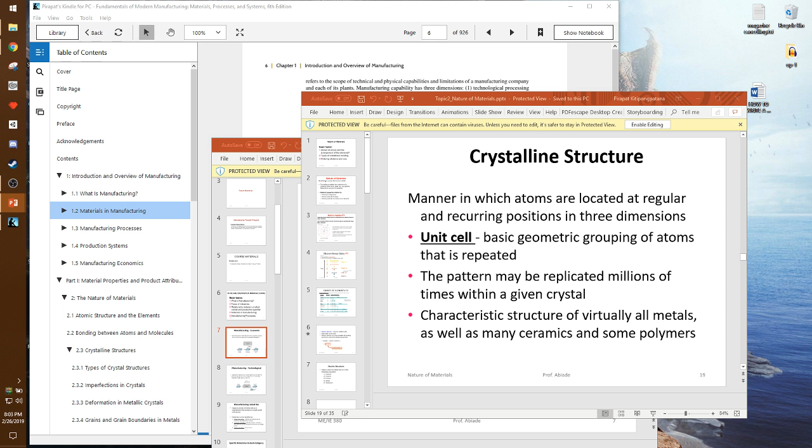This is only halfway for education. This is more for entertainment, for my entertainment. Maybe I should turn this app back to entertainment instead of education. I have no credentials. I am just a student in mechanical engineering. So I'm not teaching anything because I'm not a teacher. No!

There's economics, the economic way of viewing manufacturing, where you put value into a thing, so that you can sell it for more than what it costs you to get it.

How many can I have? Yeah, as many as you want, Chris. Is there always chicken on it? Chicken? Is it chicken? I don't know. Why is there chicken on it? There's a lot of stuff on it. There was ham on it, and I was like, "What? There's ham on it?" It's always in the box. Yeah, Papa. Was it? I don't know. I saw it in the box this morning. I think Papa John's gives peppers, right? Not sponsored. Sponsor me, Papa. Oh wait, no. I don't know if I want to be sponsored by Papa anymore. They called him racist. And we don't deal with people who are called racist, like PewDiePie. No! No, you stop it right now. No, let's not get political.

Okay, technological. Manufacturing industries. You got primary, secondary, and tertiary. So for primary industries, think about the people that go outside and get the stuff. You got agriculture, they grow the foods. Or forestry, they cut down the trees. Fishing. They stick their hands in the rivers for the fish. You don't need to know much about that. The manufactured products. Don't need to know about that.

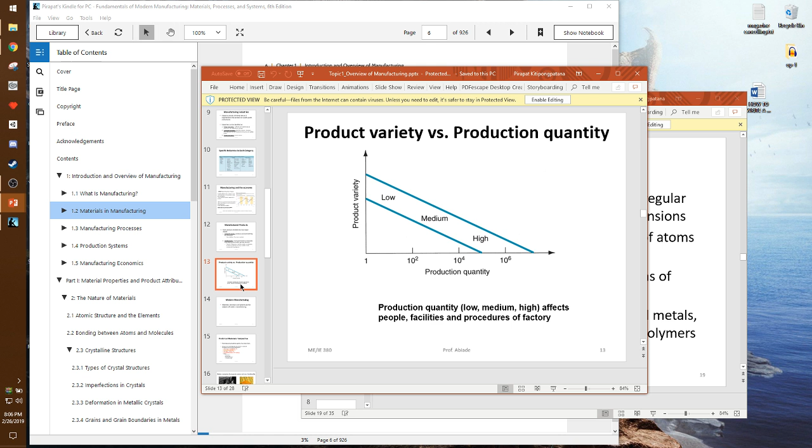The washing machines are flashy, but okay. I cannot attest to their longevity. But this isn't a washing machine review channel. This is a Watch Perry struggle channel. Huh? Washing machine is good. Washes them good, real good.

Materials, processes, blah blah blah. Mining, blah blah blah. Historical materials, blah blah blah. Polymers are powerful classes of material. Okay, cool. Metals. One of the 3 major manufacturing materials. First, you got the metals, you got the ceramics, and you got the polymers. But let's talk about metals. You may be familiar with metals and what metals are. There's metal. There's cold metal. There's magnetic metal. Oh, here.

There's Fe, Al, Cu, Ti, Au, and Ni, otherwise known as iron, aluminium for you Brits and non-North Americans. I call it aluminum. See you later. Copper, titanium, Au. Come back here with my gold, and nickel.

We'll talk a lot about metals. Actually, I think this first test is a lot about metals. You got ceramics. Ceramics are really hard. Oh wait, no, yeah. Metals. The atoms are highly ordered. You find them in like crystal structures. They have long range order and stuff. They're very structured. Mostly because of how they bond. I guess this is all because of how the atoms bond.

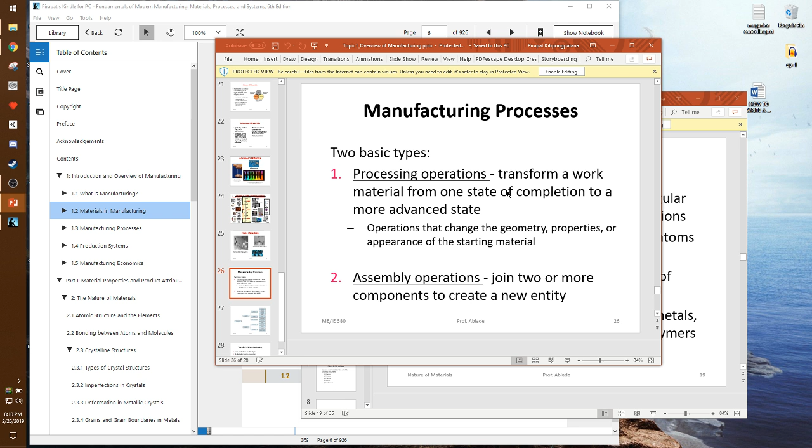So there's two basic types of manufacturing processes. There's processing operations that transform a thing, like a block of aluminum, melt it down, and push it through a hole to get extruded aluminum. Or bending sheet metal to make a thing. And then there's assembly where you get the sheet metal that's bent, and then you put screws on them or weld them together, join two or more components to create a new entity. Those are two different manufacturing processes.

Blah blah blah. Trends, blah blah blah. Six Sigma, whatever. All right, moving on. Nature of materials. Atomic structure, the atoms and stuff. Atoms are expensive and important. Got interatomic bonding, ordering of atoms and ions and whatever.

Where am I at? Oh, jeez. These pages. Yeah, a couple pages in my notebook are torn off pages that I kind of just pushed back into the binding because I took the notes in the wrong notebook and I wanted to have the pages in the right place. Oh, shoot! I forgot, that way I can have a cheat sheet. All right, let's make that around. Cool. Huh? What?

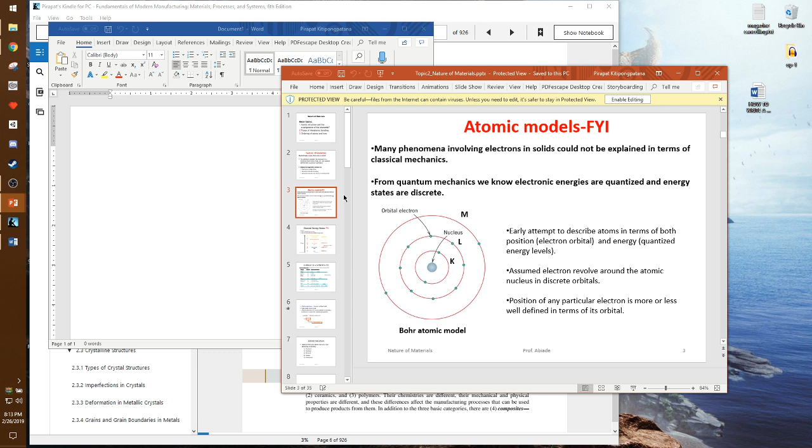What is my credibility? My credibility is that I took a chemistry class before in freshman year. So 1s2, 2s2, 2p6, 3s2, 3p6, 4s2, 3d10. I didn't say I didn't do well. Did I say that? Oh. Well. I didn't do terribly. That's fine. That's beside the point, because all the chemistry I need to know right now is here. It's fine. It's all good.

Fine and dandy. Valence electrons. Valence electrons are the electrons that you find at the outer shells, or the outer energy levels that atoms have. Filled shells are more stable, and atoms want to be stable because stable. They like each other. Valence electrons determine basically all the properties of an element, because that's how the elements interact with other ones, with their valence electrons. Got the periodic table, got all this group stuff. Maybe I should just have, no, that's silly.

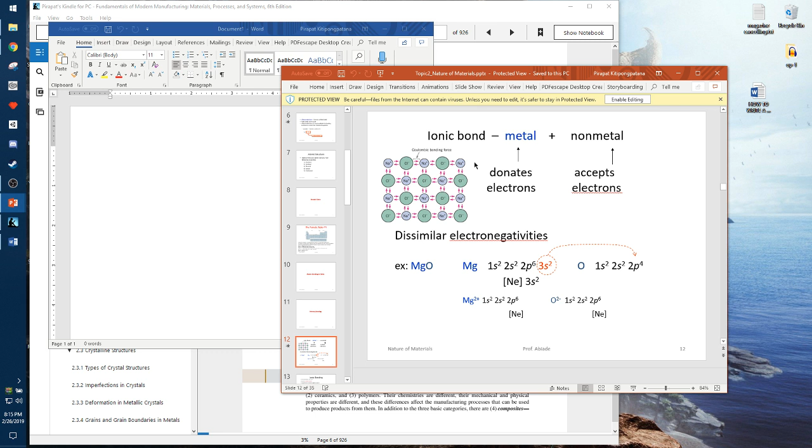Atomic bonding and primary bonding. You got the ionic bonds. Wait, no, primary bonding. Primary bonding happens between elements. This is going to be important for the different types of materials. So ionic bonding generally happens in ceramics. You got a metal and you get a non-metal, then they like each other a lot. You got the cation and the anion. Cations are the positive. That means they give away the electron. That's gonna be the metal, sorry. It's usually the non-metal, I think.

Nope, says right here, cation, usually the metal. So the cation is usually the metal. It gives away its electron to the anion. You can remember this by noting that cations are positive because they're cats.

Ionic bonding: it's a direct transfer of electrons. So, no. There's no mommy and daddy here. There's just a metal and a non-metal. The metal gives its electron to the non-metal. Oh my god, this is marriage. They're stuck together really strong. And because of this, ionic bonding is the strongest of the primary bonding types that we covered. Because of this, you can guess that the materials that have ionic bonds within them are really strong. Probably brittle. Ergo, ceramics.

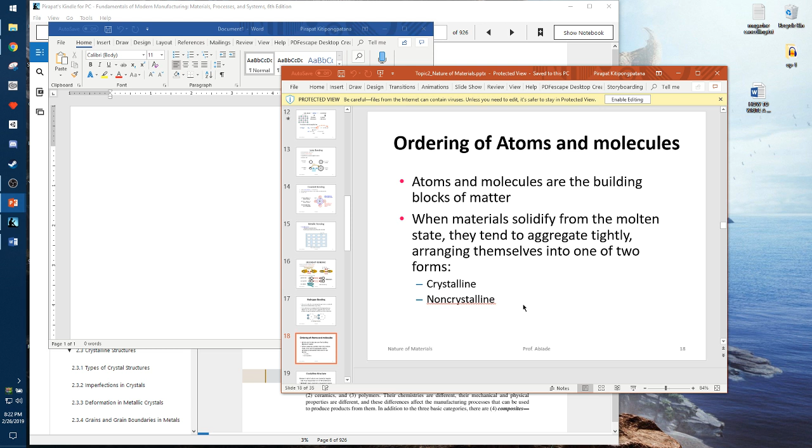Manner in which atoms are located regular with a unit cell. Basic geometry. Oh yeah, we know what unit cells are, right? I didn't say that. That is not true. You know what? Yes, that is true.

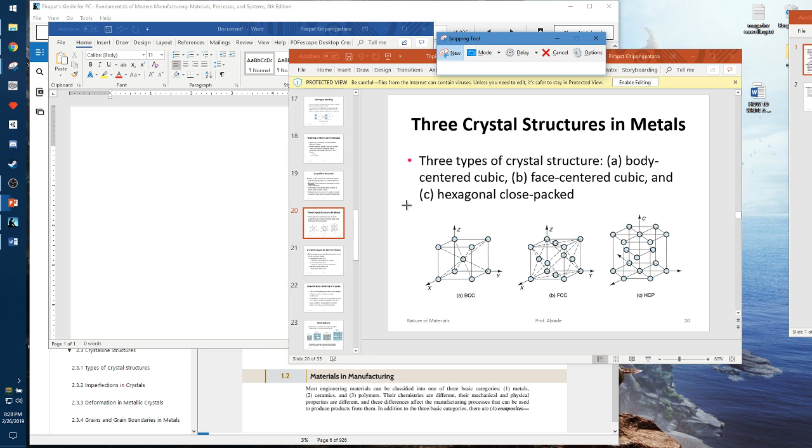Frenkel defect. That's a funny name. Oh wait, I have to make sure that I'm allowed to put pictures on my cheat sheet. Why does he call it a cheat sheet? Not cheating if it's allowed. The test will cover topics 1 through 7 of the notes posted on Blackboard. You're allowed to use a cheat sheet during the exam. You may write whatever you want on one side. It must be turned in with your exam.

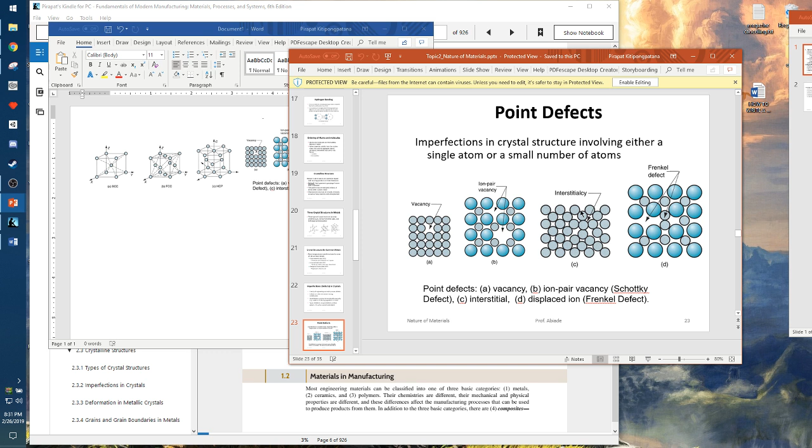Imperfections in crystal structure involving either a single atom or a small number of atoms. Okay. Either one of them goes away or you add some. Vacancy, ion pair, vacancy, ion pair. Oh, yeah. Because the big one and the small one pop out and they probably became an ion outside. Interstitialcy. That's hard to say. Good thing there's no vocal part of the exam. Frenkel defect, that's when this is moved over here.

Cool. Line defects, also known as dislocations, can take two forms. You got the edge dislocation and the screw dislocation. Connected group of point defects that forms a line in the lattice structure. These are important later when we learn about cold working, work hardening, something like that.

Hi, I'm not Michael Scott. And this isn't Michael Scott.

Edge of an extra plane of atoms that exists within the lattice. Sorry, not the lattice. No! Edge dislocation. I didn't understand this picture when he went over it in class. He said it's an edge of an extra plane of atoms that exists in the lattice, but it looks like there's an edge that's missing. I guess this one's extra. Yeah, I guess it all depends on how you look at it.

We don't have any calculations during this exam. I didn't have dinner yet. He said that we're not going to do any calculations during this exam, so it's probably going to be real conceptual.

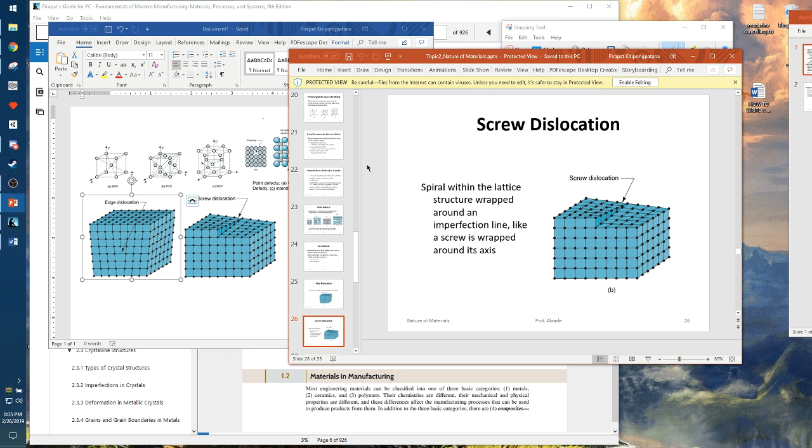Interfacial or surface defects. Surface defects, okay. Surface of a crystalline object is an interruption. Grain boundaries are internal surface interruptions, blah, blah, blah. What? Wait, so are grain and grain boundaries surface defects? Let's see. Oh yeah, grain boundaries are an internal surface interruption. Mm-hmm. Each of these chunks is a crystal. And when the crystals grow and smack each other, that's where you get grain boundaries.

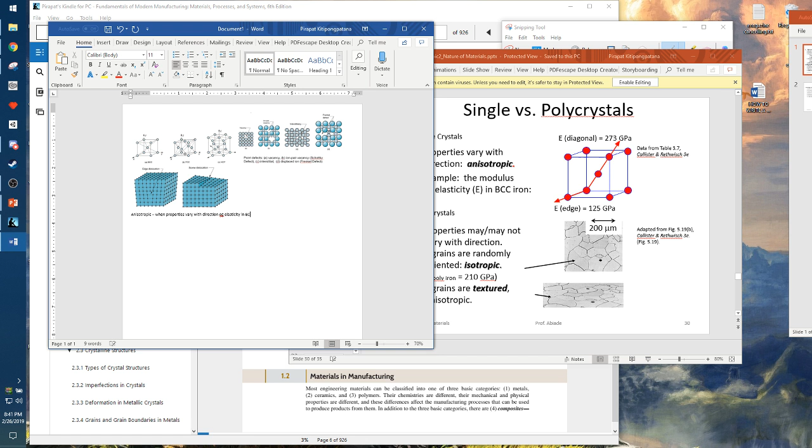E.g. If grains are textured, you get anisotropic. Yeah, textured grains usually means there's some sort of crystalline structure because it repeats over a relatively long distance compared to an atom size.

Distance. Electron microscopy. Grain boundaries. What's this? Polymorphism: two or more distinct structures with the same material. That means you get different properties.

I got a 95. On what? Reflection journal. Nice.

Thanks for warming up the pizza. What'd you do with the olives and mushrooms that you picked off? I ate some. You did? Yes. Why? It was disgusting. This isn't cold pizza. It's not cold pizza. Papa John's, good cold and hot. Not sponsored. You don't deserve that pizza. Give it back. To John? I don't like that anymore. Wait, what? Why is there a bite taken out of this slice?

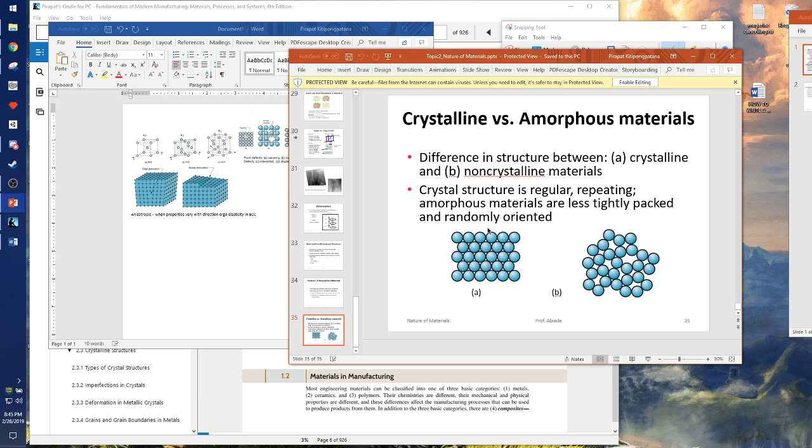And remember guys, glass is not a liquid. Glass is a liquid. Did I ever tell you about that? Glass moves, I told you about this, very slow. Glass is not a liquid. Glass moves very slow. Oh my god!

Alright, let's review. Did we learn all this? We went over electronic structure, types of bonding, crystalline structures with types and defects, amorphous materials, lack of order, and differences in melting and solidification.

Okay, I don't remember the differences between melting and solidification. Uh-oh.

Glass is a supercooled liquid. Who says that? Scientific American. Who says that? Glass is an amorphous solid. States somewhere - solid! A state somewhere between those two states of matter. No! Yes! That's what amorphous solid means! Amorphous solid means it's a solid without a distinct crystal order. It's a liquid. Fly, banana! Go drink some glass.

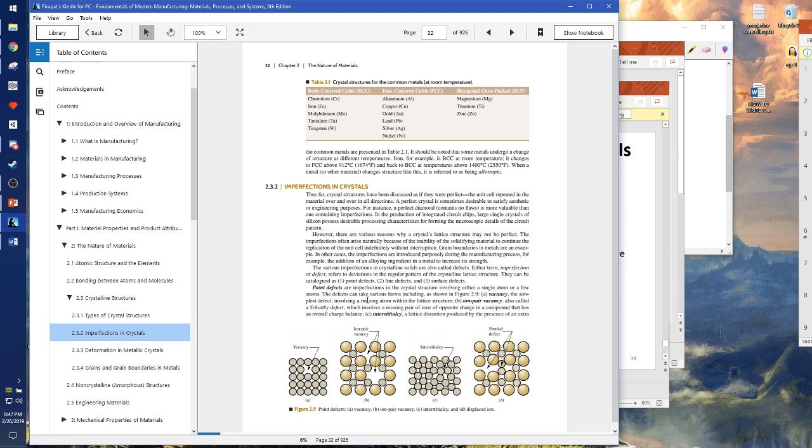You can't drink glass. Why? Because the atoms in the glass move too slow. So you're saying you can never drink glass? Well, if you want to live to be 100 years old, you can probably drink glass. Okay, but you gotta start drinking it from when you're 5. Okay. We're on the same page? Okay. Blah blah blah book, blah blah blah. I'm a book and I'm boring, said this book. I'm glass and I'm liquid, said that window. What? I'm tired. Go drink some glass. I would, but I can't because I'm already a quarter way to 100. Girl, you ain't 25. You're right. You 50. That's... Stop, what? He's 75? You're already 99. Ah, okay. That's not fun for that.

With that - metals have crystalline structures in the solid state almost without exception. Ceramic molecules are characterized by ionic or covalent bonding or both. The metallic atoms release or share electrons, blah blah blah. Ceramics possess either crystalline or non-crystalline structure. Most ceramics have a crystalline structure.

Like salt. I'm changing my name to salt, to Michael Scott. Whereas glasses based on silica are amorphous. In certain cases, either structure can exist in the same ceramic material. When this mineral is melted and then cooled, it solidifies to form fused silica, which has a non-crystalline structure.

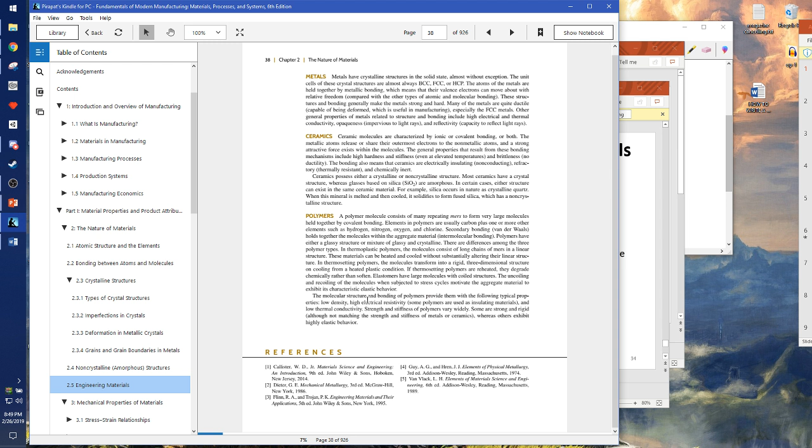How many mers you got? Cause I got a lot of mers, cause I'm a polymer. Just living on the floor. Huh? And I'm calling the police. And I'm recording your channel. We're pretty much just don't for what? For what? Copyright.

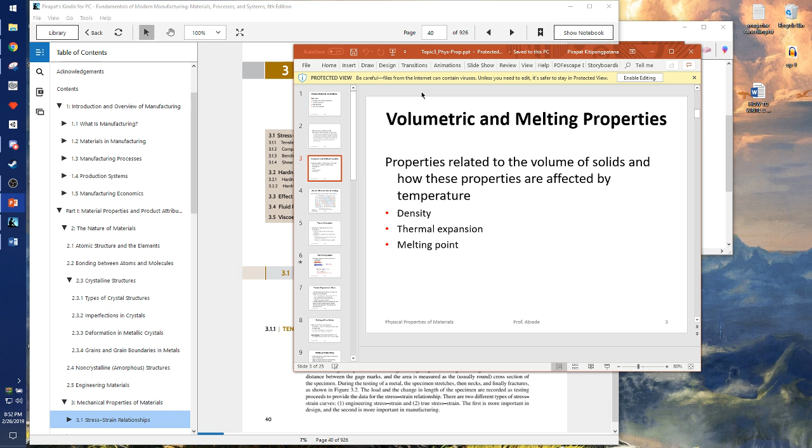Density, thermal expansion, melting point, atomic vibrations due to heating, thermal expansion. What do we need to know about this section? Density, thermal expansion, melting, and diffusion.

It's like nothing, a humidifier? In general, the density decreases with increasing temperature, right? In general. Now there's one thing that's very common that breaks this rule, breaks this generalness.

Do you know what it is? Glass. Water. I was close. Because water is a liquid. No! Glass is also a liquid. No! God, please, no! Michael, no! No! Water, the density decreases when you freeze it.

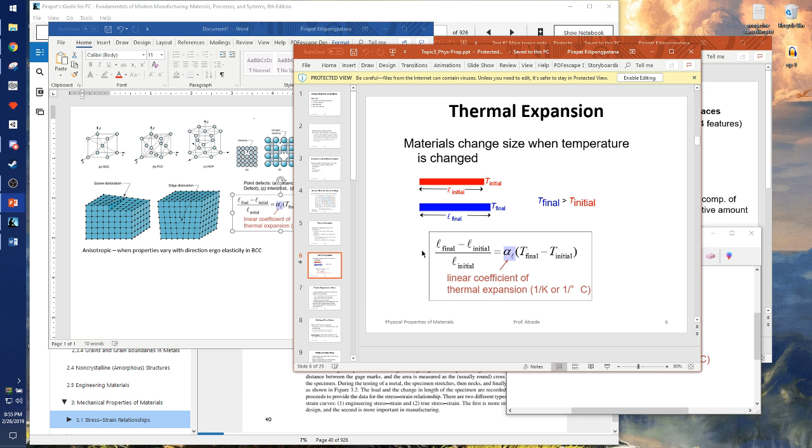Stop it. Thermal expansion in manufacturing. You can use it for a shrink fit, that's when you get something cold and put it back into something, and when it gets warmer, it fits. Thermal expansion can be a problem. Welding, blah blah blah. Melting of pure metals, heat of fusion.

I know what that is. Melting of metal alloys. TM is the melting temperature. Melting of alloys, alloys don't have a single melting point. Oh, this is where we talked about phase diagrams and stuff. These are pretty important, maybe I can look at this.

It's $16. You know what else is $16? The bag that I want is $16. 160 chicken nuggets from Burger King. You know that because you've done that before. No, I've only done 100. I've only done nuggets in the 100. How come you didn't upload the nugget challenge then? I didn't do the nugget challenge. It wasn't the nugget challenge. You guys want to see a nugget challenge from this channel?

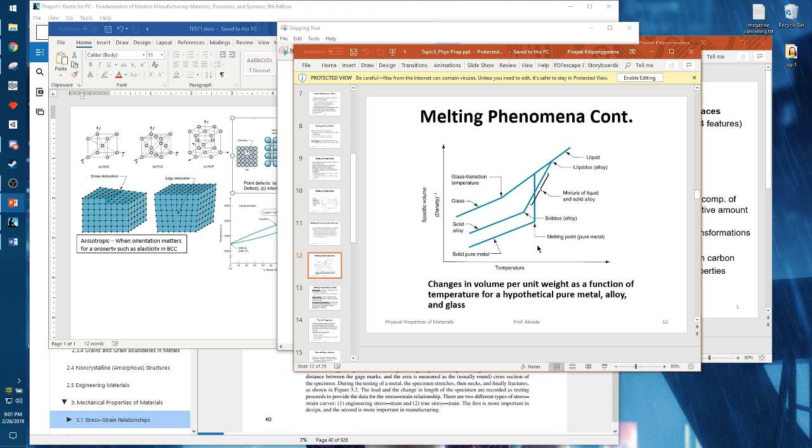Say it again. I don't have time, I'm running out of time. Okay, big news.

In half an hour, I will reveal the next Papa John's promo code. I wonder if it's location specific. Wouldn't that suck?

Fun fact: the linear coefficient of thermal expansion is a material property. Based on the three broad categories of materials - metals, ceramics, and polymers - polymers would expand the most, metals second most, and ceramics the least. We can come to this conclusion by thinking about the way they bond. The tight ionic bonds require a lot of energy to break, so ceramics probably don't expand much before they just shatter.

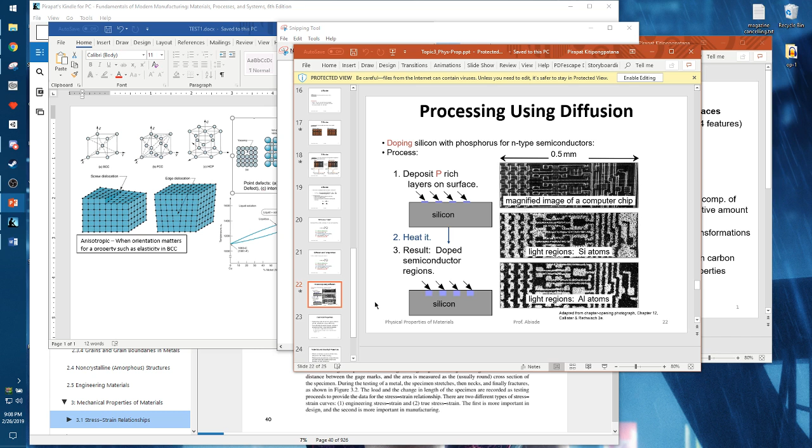Dope the silicon to make it semiconduct - oh yeah, that uses diffusion. Electrical properties: engineering materials exhibit a great variation in their capability to conduct electricity, like copper conducts electricity really well while wood doesn't.

Dimensioning surfaces and the... whoa. Did I miss a day? Nah, electrical properties, blah blah blah.

Metals are best conductors because of metallic bonding. Ceramics and polymers are probably poor conductors, and many materials are used in various applications. Alright.

I found it, I found it. I have found the gum - the Trident Minty Sweet Twist. Artificially flavored.

Ah! Of all the angles you could have thrown it at. No one saw that, no one saw that. This is a no camera stream. Oh my god. Aw, that was funny.

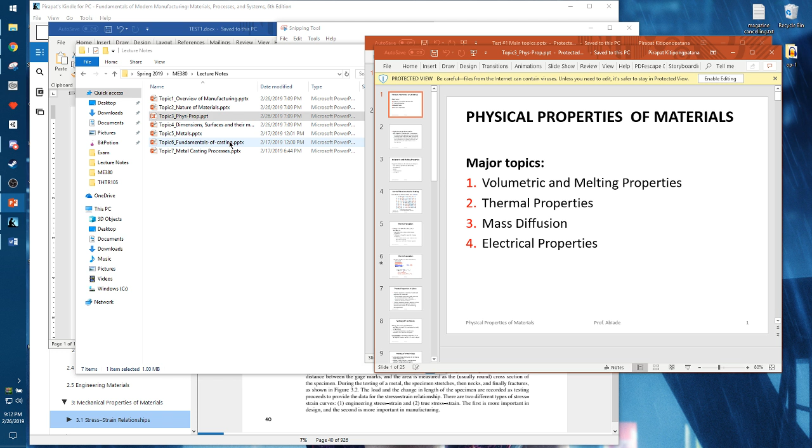Just stop licking the gum. I'm gonna be okay. This is the wrong topic. What? Oh, distracting you? You are not distracting me. Are you sure? My stream is distracting me.

I'm gonna be taking the exam, and I'm gonna want to be talking out loud during the entire exam, and that's a big no-no. I'm gonna be like, oh, surface texture, I remember 4 features. And it'll be like, shh. And I'll be like, you, give me your exam. And I'll rip it in front of the whole class. And I'll be like, oh man, come on, professor.

Dimensions, surfaces, and their measurement. Let's see. We're going to learn about the definition and types of tolerances. We're going to learn the types of surfaces, and we're going to learn 4 elements of surface texture. We're also going to learn about surface integrity. All right. Dimensions. That's the dimension. Tolerances. That's how much we allow a material to be manufactured differently from the nominal dimension.

So if I tell you to make a steel rod that's 1 foot long, I have to tell you how close to 1 foot it has to be. It could be plus or minus an inch. Why can't it just be 1 foot? It's really expensive to make something exactly 1 foot. That's stupid. Why? The precision is expensive. Precision takes money, it takes time, it takes expertise. If they're good at their job, then it wouldn't take much.

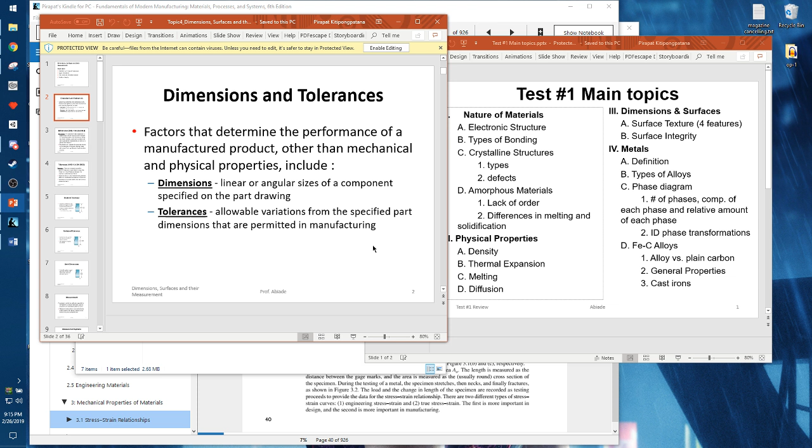Alright, we know what dimensions and tolerances are. ANSI Y14.5M 1982.

Glass is liquid. Glass is not liquid. Glass liquid. And water's not wet. Whatever. Well, what does wet mean? Wet is water. What? Mhm. And the Earth's flat. Yes, we all know the Earth is flat.

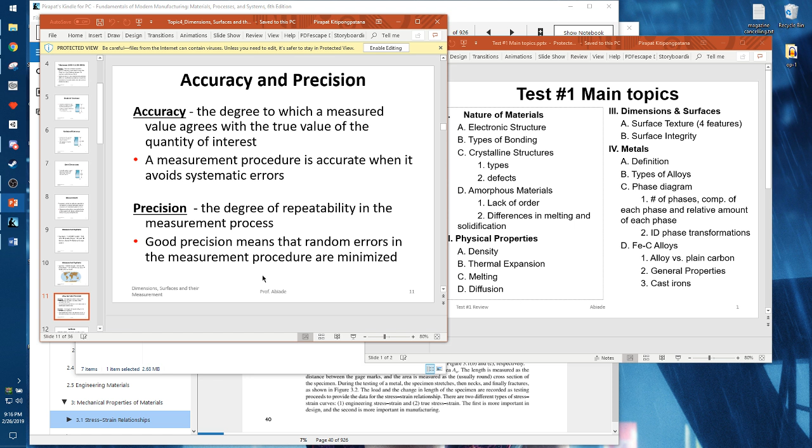Measurement. Measurement systems. Yeah, we know about this. Accuracy and precision. Yeah, we know about accuracy and precision. Surfaces. Haha. This is when it starts getting interesting. Nominal surface is the designer's intended surface. So if I write on the engineering drawing that this surface needs to be shiny, that's the nominal surface. Oh, it's not. That's when you draw edges that are lines.

Actual surfaces are determined by the manufacturing processes used to make them. For example, sand casting. Do you know what sand casting is? You get the thing in the shape that you want to make. You put it in some sand, and you put another block of sand on top of it. Press it together. Take it apart. Take the thing out. Then you got a sand mold, right?

Then you put it together. You pour the metal in. Then you open it and you get a part, right? But because we use sand casting, that determines the surface of the cast. It'll be all bumpy and stuff because sand is bumpy. Coolio.

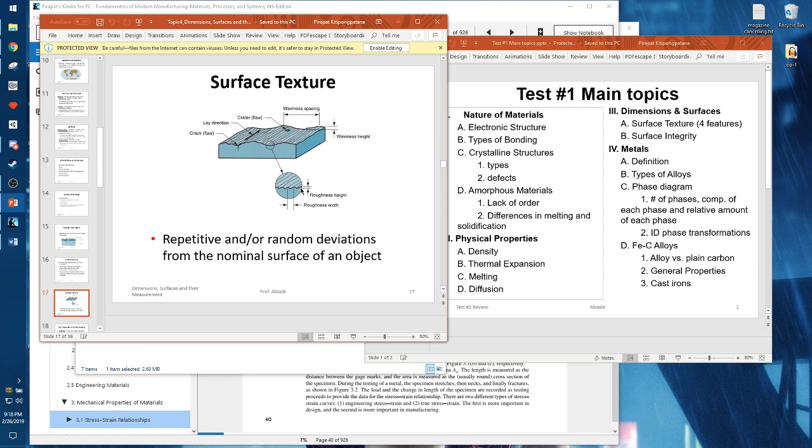But what are the 4 features? Aha! 4 features! Roughness! That's when you get small, finely spaced deviations from the nominal surface. They gotta be small, and they gotta be finely spaced. Then you get waviness. Deviation, but with larger spacing. It's like the difference between scratches, or big, like using a comb and making big raking things. Like sandpaper and brushed aluminum, I guess. Lay is the brushed aluminum.

What the heck is waviness? Roughness is superimposed on waviness. Oh, waviness is just bigger roughness? Oh, sure, whatever. Remember that. In order to remember this, I will not write it down on my cheat sheet. Is that a good idea?

Crater. Co-host. No! Yeah, fine, sure, I'll write that down.

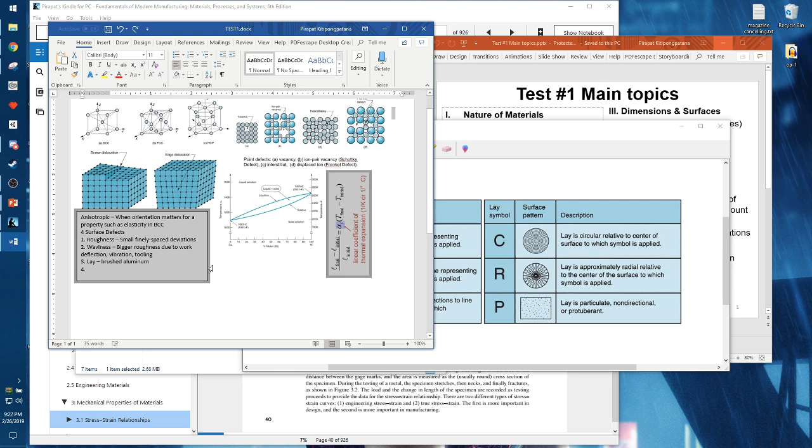I wonder if I need this. Probably not, but let's find out. I mean, let's not find out. I'll have this anyway. Don't do that. Whoa there. Hello? Why you gotta... I'm running out of space! Behind text.

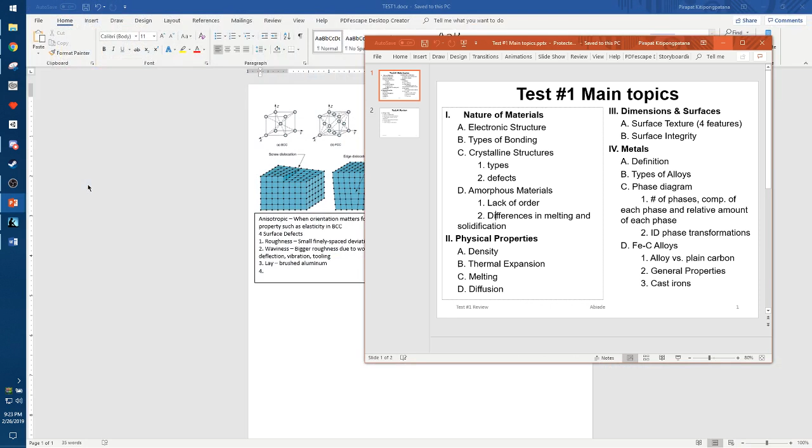That's okay. Alright, we got the 4. Nope, we're on the 4th one. Let's look at this. Flaws. Yes, flaws. You got cracks, scratches. What are inclusions?

These also affect surface integrity. Alright, now that we know that they also affect surface integrity, let's bump down this. I spelled it wrong. Alright, what else is on this list? Surface integrity, nice. Just for fun, we will do roughness is quantitative, finish is qualitative.

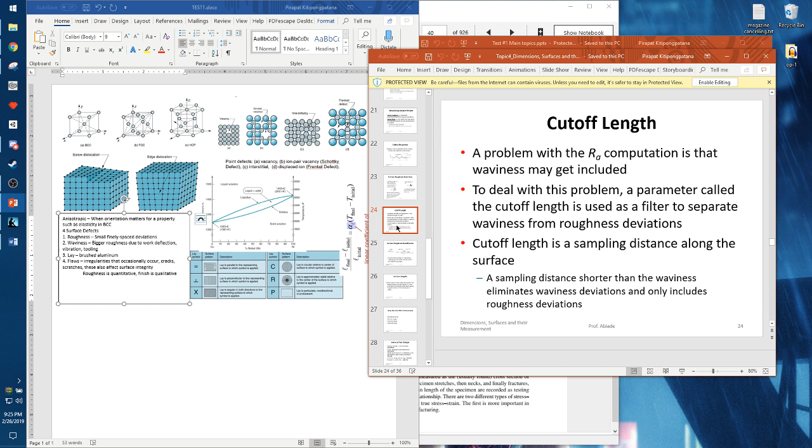Got equations for roughness, probably don't need that. Holy moly, if we need this, I would be out of luck. It's an integral. Fancy schmancy. Surface roughness specification. Oh, maybe I need this.

Oh, no. Why? No! Let me click on nothing! Why do you do this to me? Hopefully I can read that come exam time. Coolio.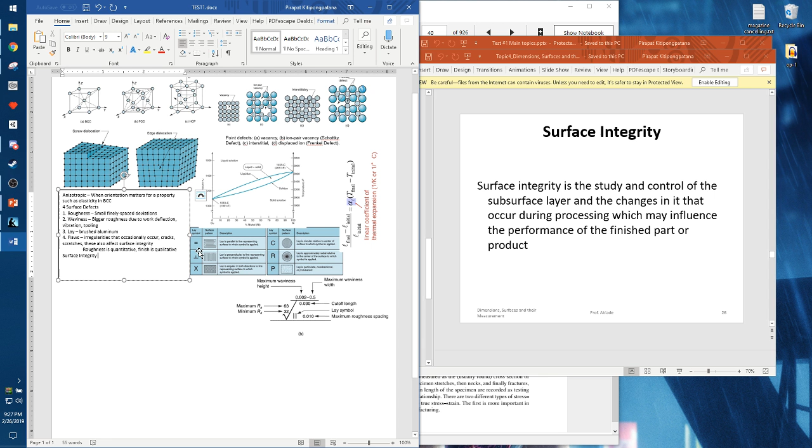Alright, let's put in what surface integrity? Surface. It's the study and control of the subsurface layer and the changes in it that occur during processing, which may influence the performance of the finished part or product. Mechanical, thermal, chemical, electrical.

Stress in the subsurface layer, mechanical. Cracks, microscopic, macroscopic, mechanical. Metallurgical changes, thermal. Corrosion, chemical. Changes in conductivity, electrical. Okay, cool. Surface texture, geometry of the surface. Surface integrity deals with material immediately beneath. Measures of roughness, stylus equipment, nanoscale roughness.

Results, evaluation of surface integrity. So you get the roughness, layer orientation, visual inspection of cracks, hardness testing, microstructural investigation, residual stress analysis. Oh, chapter 6 is going to be a doozy. Chapter 6 was so big. Then metal casting. Man, there is a lot left.

Not even halfway done. Well, I guess it's only been an hour and a half of studying and basically me talking the whole time. Let's reload this and good. Stream is healthy. Stream options, enable DVR. Is this education? Yeah, it's education. Three minutes. We get the Papa John's.

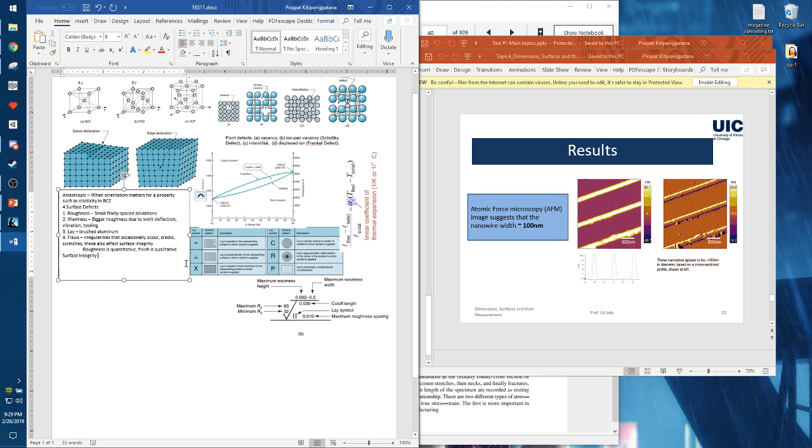Surface integrity is, what is it? There's a nice, I guess I'll just copy this. Changes to the subsurface that resulted from the processes that created it. Don't make fun of my typing. Probably bold this so I can see it. What else? What else?

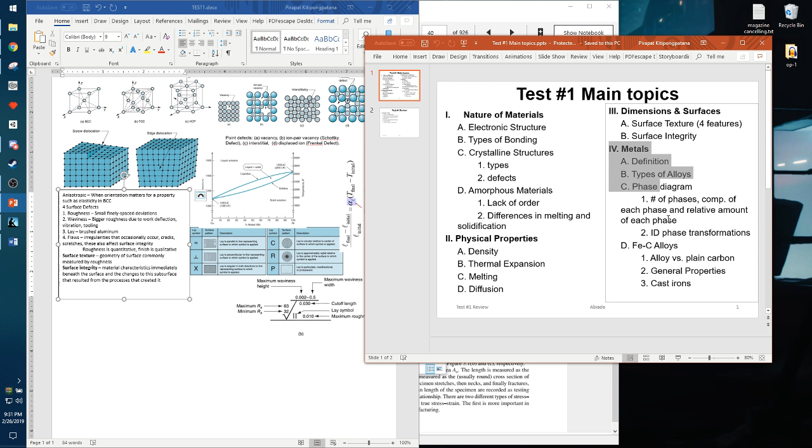Visual inspection, tolerances. Machines generally accurate. Sand casting, inaccurate. Gotta have big tolerances. Some processes are inherently capable of producing better surfaces than others. Honing, lapping, polishing, super finishing. Cool. Done with topic 4. On to topic 5, metals. Melting, casting.

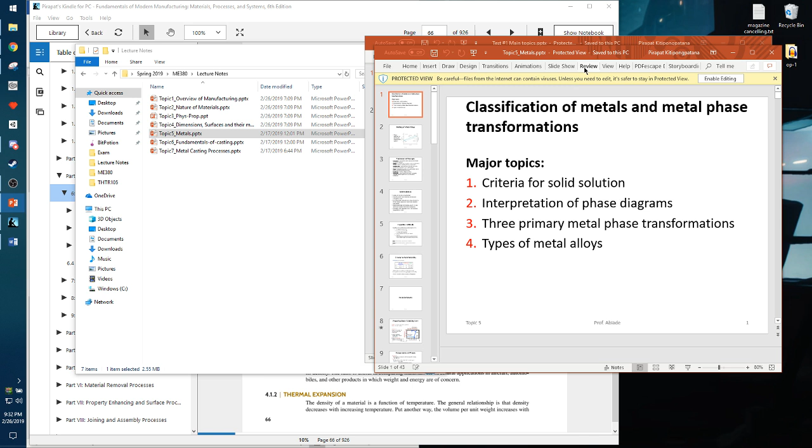Ah, jeez. And, where's 6? Where's chapter 6? Then part 2? Yes, part 2. Part 2! Metals. Shoot. These are the long ones. No! My brain's tired! Okay. Enough of that.

In this topic, we want to get the definition of metals. We want to be able to get the types of alloys. We want to be able to read phase diagrams. We have to learn how to identify the number of phases, the composition of each phase, and the relative amount of each phase. Then we gotta be able to identify phase transformations. We got the different kinds of phase transformations. Oops. We gotta look at iron and carbon alloys.

I don't need all these. I think I know what a point defect is. Maybe I need this though. I'll need this later. Might need this. Might need this. This can just be there. Open a bunch of space up here. Okay. Okay, iron and carbon alloys. Cool.

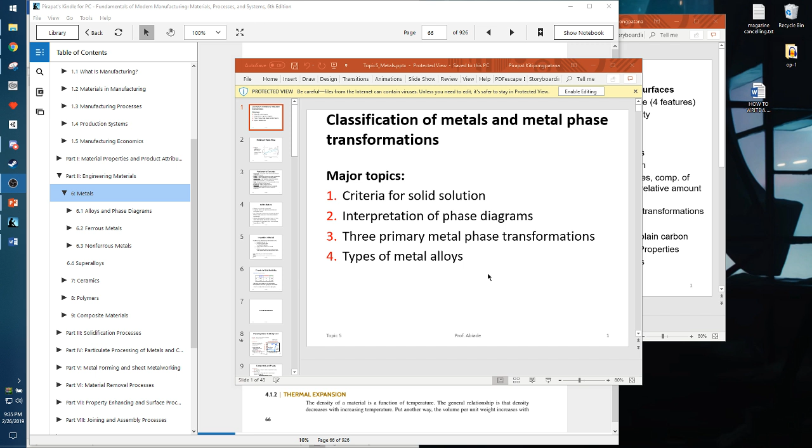Got the criteria for solid solution. We got the interpretation of phase diagrams. We also have the 3 primary metal phase transformations. And last, but of course not least in any sense, is the types of metal alloys. Okay, cool. Melting of metal alloys. Here you have a phase diagram for the nickel and copper alloy system. As you can see, nickel and copper are completely soluble.

Can you hear my watch?

Anyway, state of equilibrium. Never completely achieved. Small changes may occur, may persist indefinitely. Okay, cool. Solid solutions. Hey, that's one of the things we need to know, right? Definition. Oh, oops. Definition of a metal. Oh, I know the definition of metal. That's a metal. Also, metal and metal.

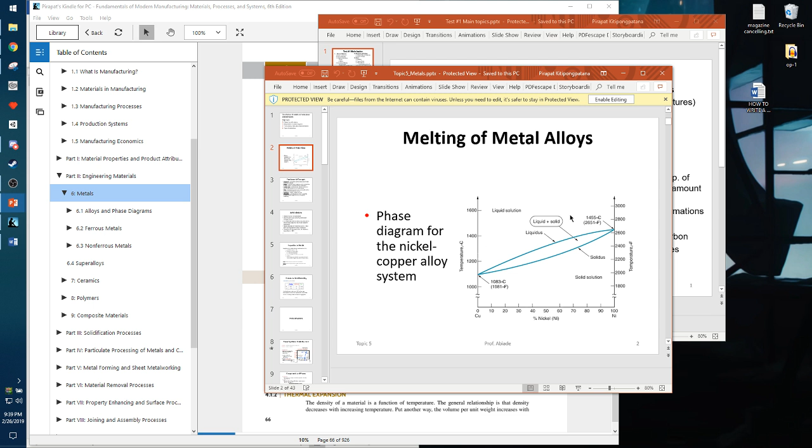Alright, solid solutions. Atomic diameter of interstitial atom has to be a lot smaller than the host atom. Not favored for dense structures. Generally, max allowable concentration of interstitial impurities is less than 10%. Cool. Let's see what my notes have to say about that. Fundamental concepts, components, systems, solubility limit, phase, equilibrium, metastable. Isomorphous: any percent of either for all concentrations. They are mutually soluble. Oh, that's from the phase diagram of copper and nickel.

Solute is the thing that's being dissolved, and the solvent is the thing dissolving the solute. I'm a solute. Salt is the solute. Water is the universal solvent. Nice. Solid solutions. Crystal structure is maintained. Impurities are randomly distributed. Interstitial atoms. Oh, yeah. Impurities in metals. Substitutional solid solution. What? Oh, yeah, okay. So the nickel copper alloy is a substitutional solid solution.

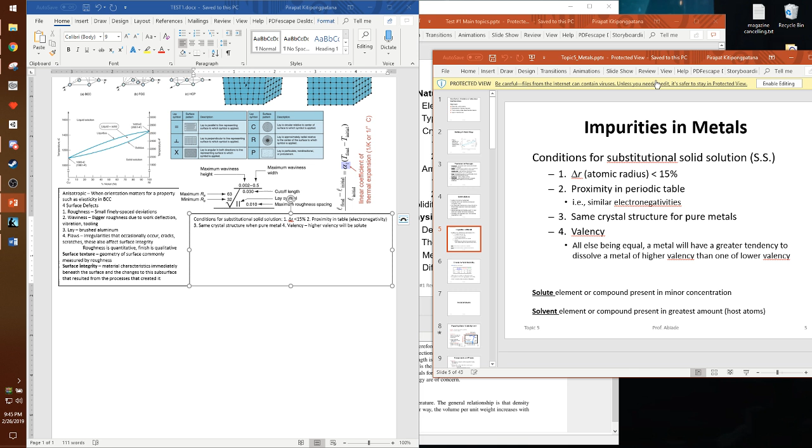Proximity in table. Electronegativity. And 3, crystal structure of pure metal. And 4, valency. Cool. Nice. Oh, there we go. Nickel and copper. They got the same FCC crystal structure. The electronegativities are pretty close. And the radii are even closer. That means they are totally soluble in one another for all proportions.

Okay, phase diagrams. This is where things get hot and heavy. Literally, look at that. Temperatures upwards of 100 degrees Celsius. That's boiling. That's pretty hot, but it's not as hot as this. Temperature is at 1,600 degrees Celsius. That's super hot. Don't touch that. You will burn your hand. Get like 3rd-degree burns and stuff.

Don't let me sleep. Don't let you sleep? I already did. You slept for like half an hour or something. Yeah, but you could do it today, and then you would have less that you have to do tomorrow. I deserve the world right now. Huh? You what? Deserve the world. You deserve the world right now? I don't know what that means.

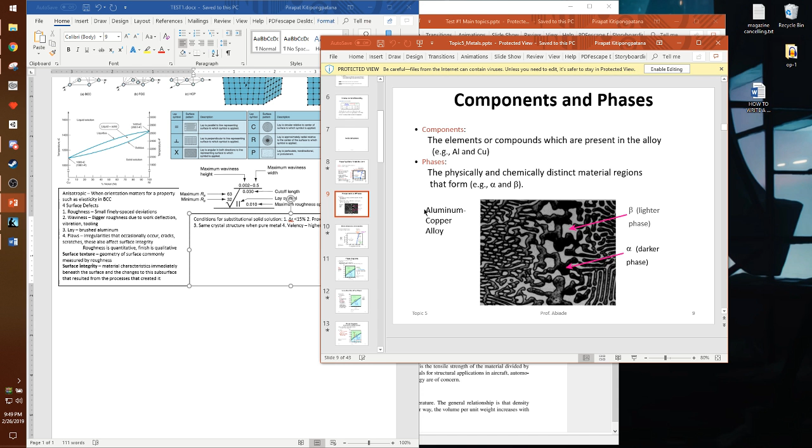Components and phases. Components: the elements or compounds which are present in the alloy, e.g., aluminum and copper. Phases: the physically and chemically distinct material regions that form, like alpha and beta. Alpha is the darker phase. Beta is the lighter phase. This is a picture of an aluminum copper alloy. Altering the temperature can change the number of phases, and altering the concentration can also change the number of phases.

To figure this out, you gotta go here, and go down, and go here, and go down, and then something in the middle, or I don't remember. Oh, that's how much liquid there is. That's how much alpha there is. Okay, this system's binary. It's also isomorphous because it has complete solubility of one component. Isomorphous. Okay, how do you determine the phases present? How do you know this is 35 weight percent nickel? Oh, at this point it's liquid plus alpha.

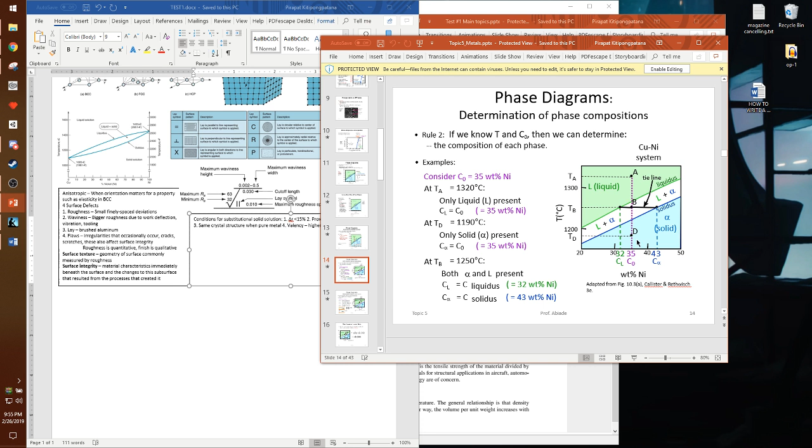Now, to do this, you can do the measuring thing and get that. Or, there's another way to do this, right? S over R plus S. Or it's 43 minus 35 over 43 minus 32. What's 35? Oh, okay, 43 minus 35 over 43 minus 32. 43 minus 32 is the entire zone. And you get the weight fraction, and that's how you do it. Okay, cool. I think I can remember this.

I'll take a break at 10. 10. Should I turn on some music? Is that what the people want? There's my water bottle. Vata! You guys hear that? Pretty crazy, huh? Okay, no, I'll turn that down. Sorry. Should I put more gain on this? No, it's fine. It's peaking too much for my liking. Oh, whoa. What happened there?

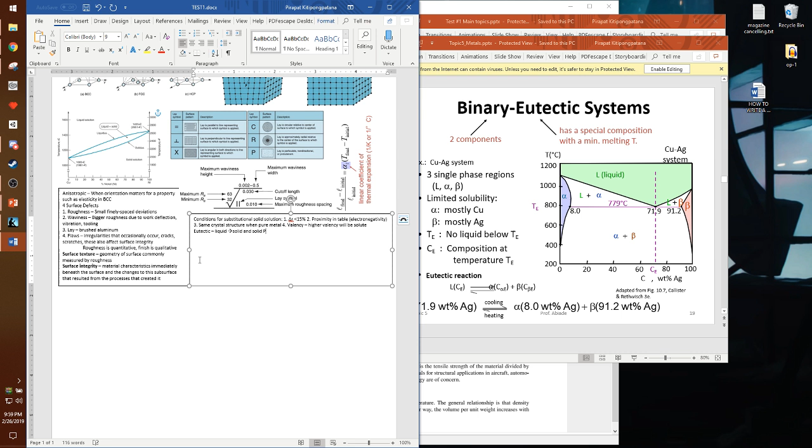Alright, binary eutectic. Eutectic is an important word. We need to know this. Eutectic is when a liquid goes to a solid and solid. Peritectic. Ah, that's kind of like me. Lamellar. Oh, nope. Let's go to eutectoid. Eutectoid is where a solid goes into solid plus solid. It's like eutectic, except with solid. And peritectic, that's the one that's kind of like me. Solid plus liquid gets to be a solid. And that doesn't fit in one line. So it is a travesty.

How do I fix this? I have no idea. Alright, fine, I'll do it. S1 plus S2. You got S1 into S2 plus S3. Peritectic, you get S1 plus L, and you get S2. And these arrows are two directional. Does this work? I guess I'll just keep it like that. I don't need no fancy arrows. I understand what this means.

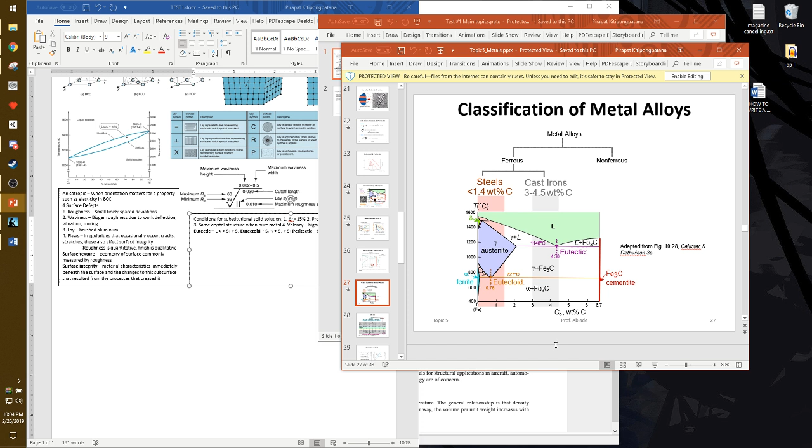Okay, ID phase transformation. I can do that. Wait, did I get the types of alloys? What are the types of alloys? I don't know. Classification of metal alloys. Ferrous and non-ferrous. Is that what it is? Man, I wish I had the quizzes back.

I'm a noble metal. I'm expensive. Oi! Oi! Oi! Where's the...

Fundamentals of casting. I'll get casting later. Metal casting processes. I already have a sheet on that. I can probably figure it out. It is 10:04. The time is 10:04.

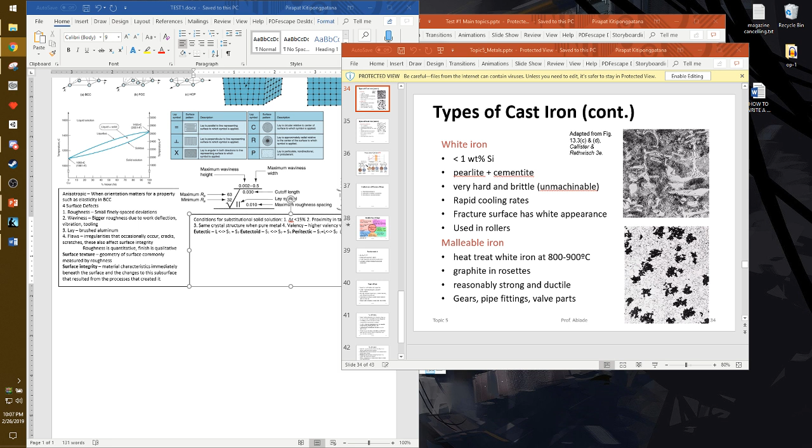Something fell. It was small. Uh-oh. That's not right. Okay, that's confusing. Hmm.

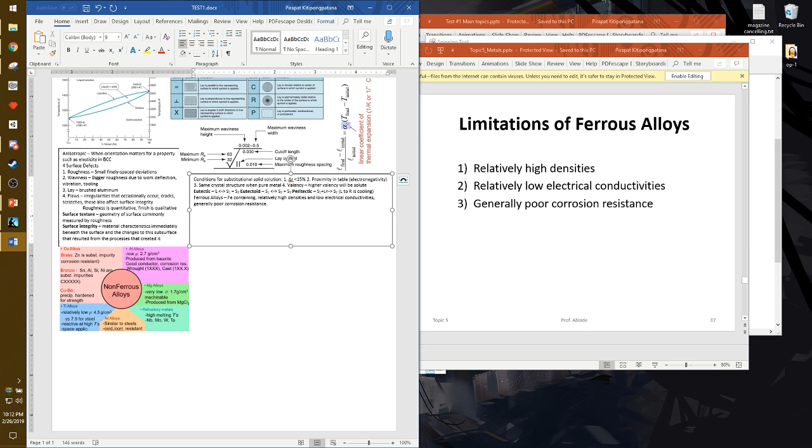Low electrical conductivity. Generally poor corrosion resistance. My professor told us a story about his metal stairs, how they got blasted and the sand got in, and then it got all rusty.

Okay, steels are less than 1.4% carbon. Cast irons being 3 to 4.5% carbon.

The tensile strength and hardness goes up as you increase the amount of carbon inside it. Tensile strength and hardness as a function of carbon content in plain carbon steel. Cool.

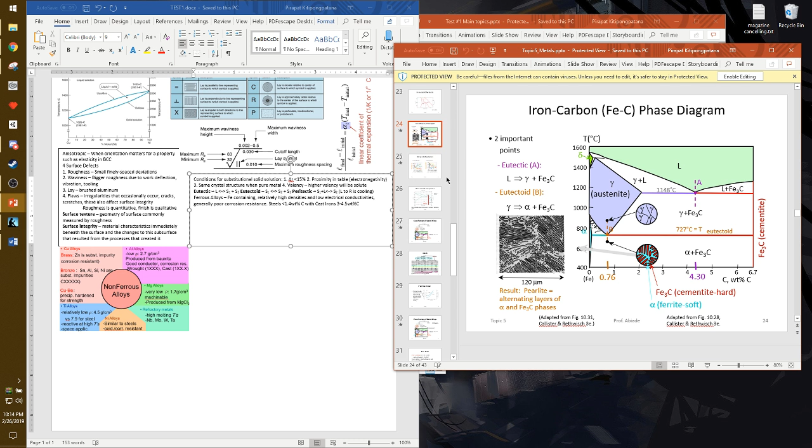Whatever. Low alloy. Increasing strength, cost, and decreasing ductility. Is cast iron expensive then?

What the heck is steel? Okay. High carbon steel. Low alloy, high alloy.

I'll just include this just in case. You can be behind the lines. No, you can be in front. Go in front.

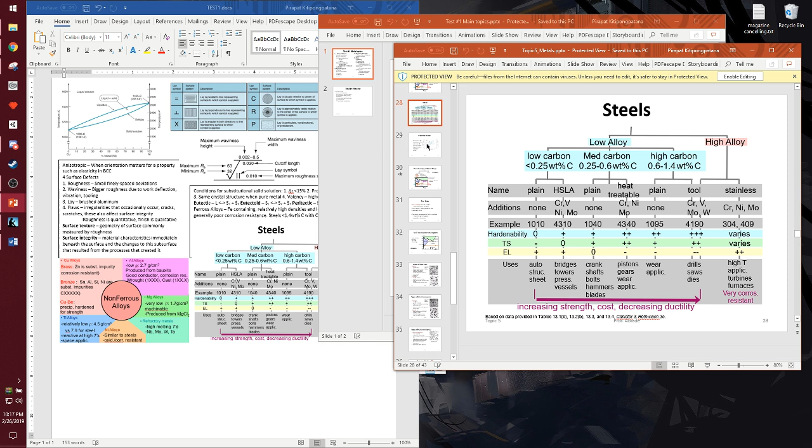General properties. 200 megapascals, yeah, let's just say that. And a tensile strength of 80,000 pounds per square inch.

What's that? What is that? What is steel? Is steel just ferrous carbon iron? Yeah, steel is just carbon iron.

Classification of metal alloys? Aha! Cast irons. Cast iron. Low melting point, of course.

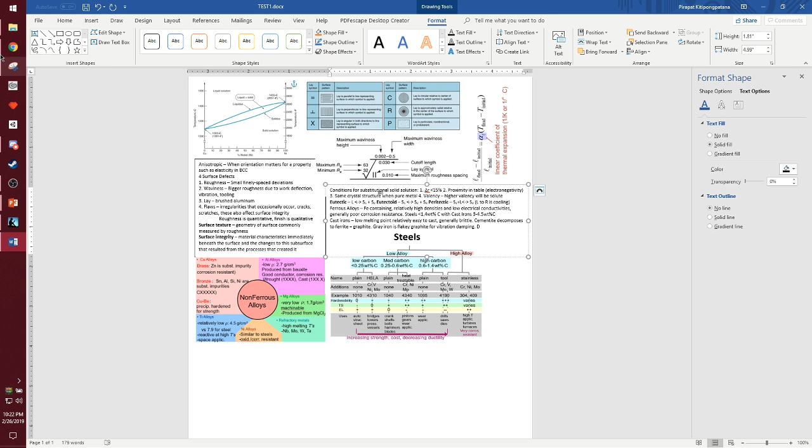Ductile iron. What? I guess I'm just copying this though. Go away. Ductile iron has Mg or Ce, for crankshafts, gears, and car parts.

White iron is less than 1 weight percent silicon with pearlite and cementite. Very hard and brittle.

Can't machine, used in rollers. Malleable iron, reasonably strong and ductile. Gears, pipe fittings, valve parts.

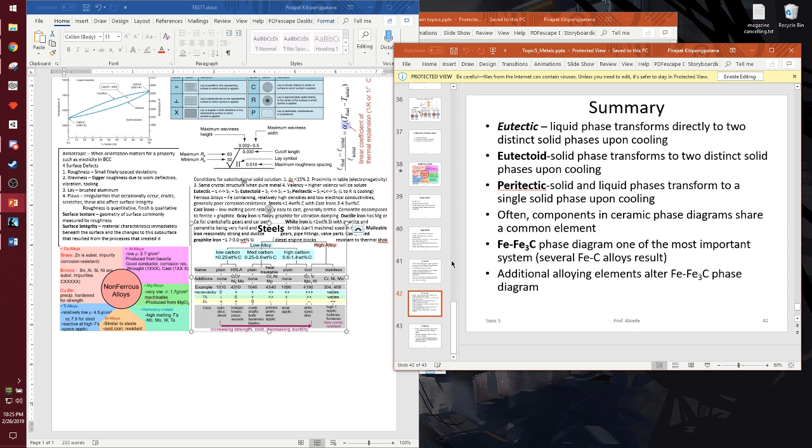The Fe-Fe3C phase diagram is one of the most important systems. Several Fe-C alloys result from additional alloying elements. To form pure metals, the metal product is often reduced from ores found in nature. Yes, of course. Generally, alloying of metals is done to enhance the properties. The metal of choice will depend on the capability to tailor its properties for the desired application.

Cool. Well, I'm going to take a bathroom break.

How do I do this? I will add in text, call it bathroom—it will say bathroom. It will be in autumn font. The color will be, oh that's fine, that's an okay color. The color will be some type of cyan. Okay.

Where is it? What the heck is it? No! Oh wait, no, did I already put it in? Get bigger.

If I can make this look better. No? Oh, the size is really small. Oh, that's really big. Okay.

How about size is 500? It's a pretty good size. Cool. Well, I'm back from the bathroom, and I don't know what this is. I guess I'll just remove this. Okay. Running out of space. How am I gonna have all the molding stuff?

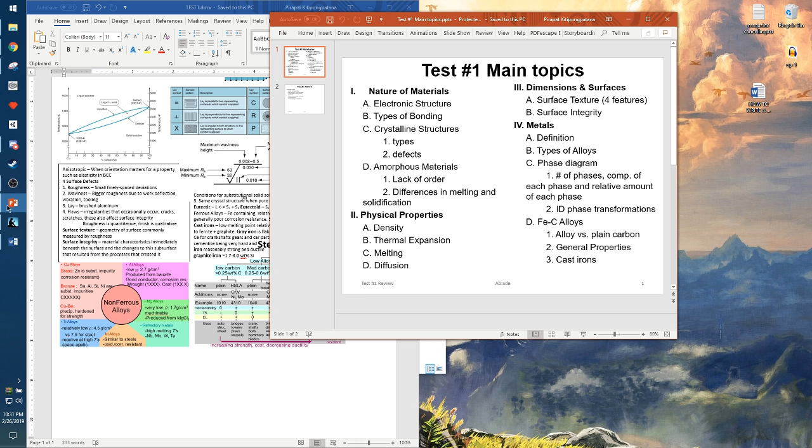Alright, let's look at some fundamentals of metal casting. Stages of metal casting and development of microstructure during solidification. Anything I don't understand? Melt the metal, pour it in the mold, let it freeze. Capability and advantage of casting. What's in that shape?

Big parts and small parts. Foundries where you make the casting. Mold, open molds, okay.

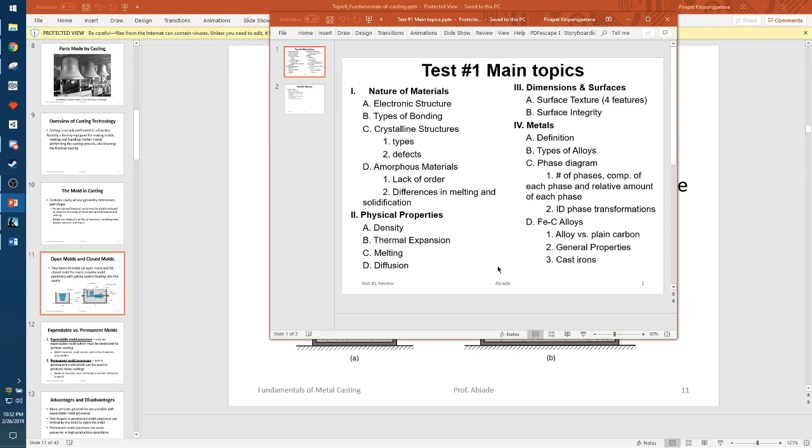Do I need that? Do I need that? Do you know this? Open versus closed? Yeah, I know that. Permanent versus expendable? Yeah, I know that. Three stages? Yeah, I know that. Various metal casting techniques? Yeah, I know those. Casting defects? Might need to review that. Product design considerations? I don't know.

How about I add this picture over here? Just for safety. Put that over here. No, move. Dang it. In front of text, whatever. Actually, I don't know why I need this part. Whatever.

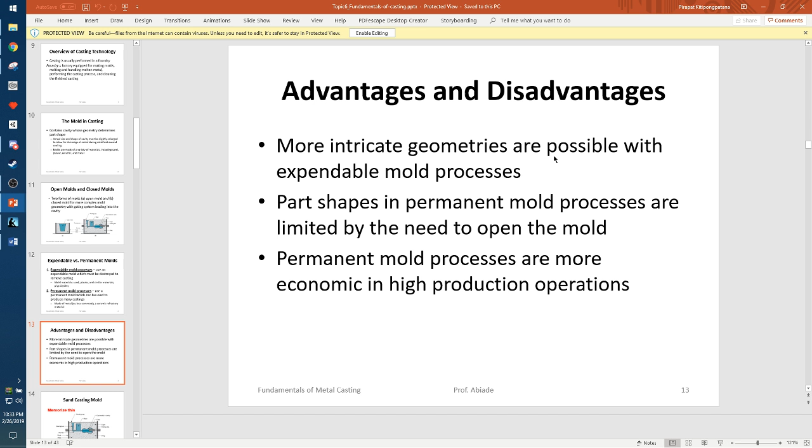Expendable mold, permanent mold, advantages, disadvantages, part shapes in permanent mold. Limited, need to open the mold. More economic in high production operations. Memorize this.

Nah. Cope and drag. Parting line, mold cavity. Use of a core, gating system. That's the down sprue and pouring cup. Riser has to freeze after the main casting. Just remember that, so you can keep filling it up as it fills.

Heating the metal, heat it up. Pour it in. Memorize this again.

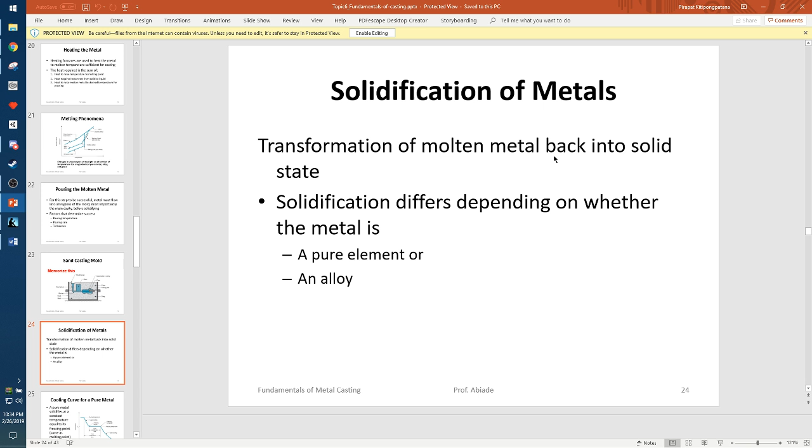Cooling curve. I'm gonna have to draw this. Pouring temperature right here. Liquid cooling, cools, and then freezing begins. It stays at this temperature for a long time. And then, once it's done freezing, it'll keep going down.

Solidification of pure metals. Due to chilling action of mold wall, a thin skin solidifies at the interface immediately after pouring. Skin thickness increases to form a shell. Rate of freezing depends on the heat transfer of the mold as well as the properties of the metal, and it gets this kind of grain. Remember that? Dots on the outside, lines to the inside, perpendicular from the wall.

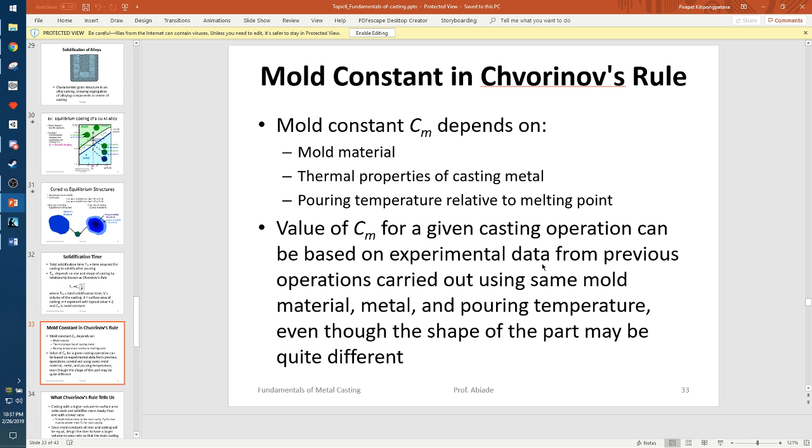Shrinkage happens. You told us to memorize it. Oh, I didn't memorize it. Thin section.

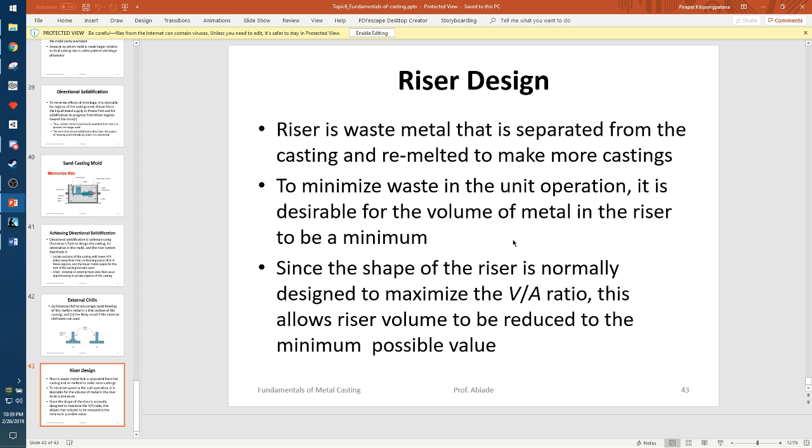Cool. I probably will be okay on all that stuff because it's pretty fresh in my mind.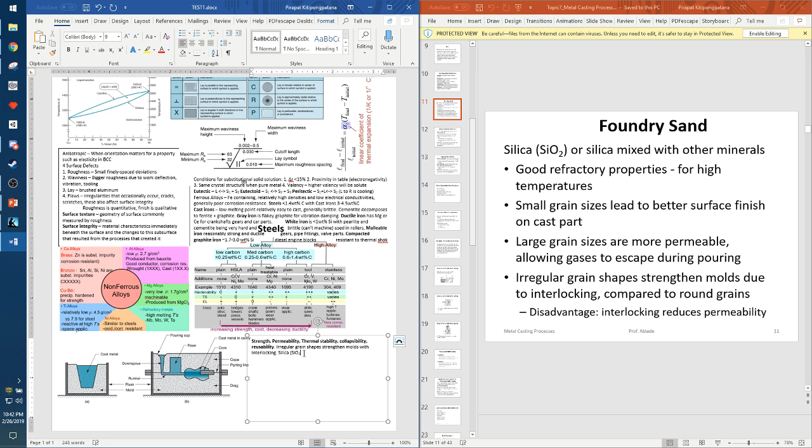Body clay, huh? 90% sand, 3% water, 7% clay. Okay, green sand. Sand, clay, water. Green means it has moisture when pouring.

At pouring. Dry sand. Organic binders, other than clay, for dimension control.

Oh jeez. Baked. So what? Nope, not hard. Skin. Oops, sink. Trying.

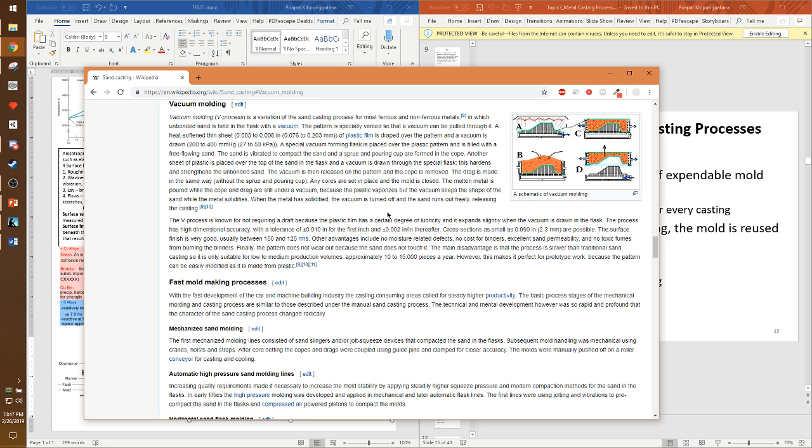Shell. Permanent is basic, die, centrifugal. Open.

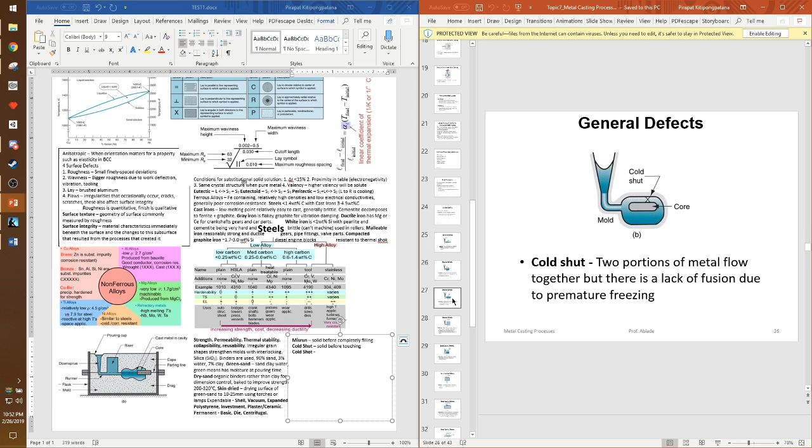Cold shots faced with the same stuff. I'm probably thinking those up. Cold shot is bubble cavities. Probably fix that with gating design, sprue design, runner design, riser design. The design of it. I could reduce the pouring speed, redesign the mold, redesign the sprue. Decrease the pouring temperature as well.

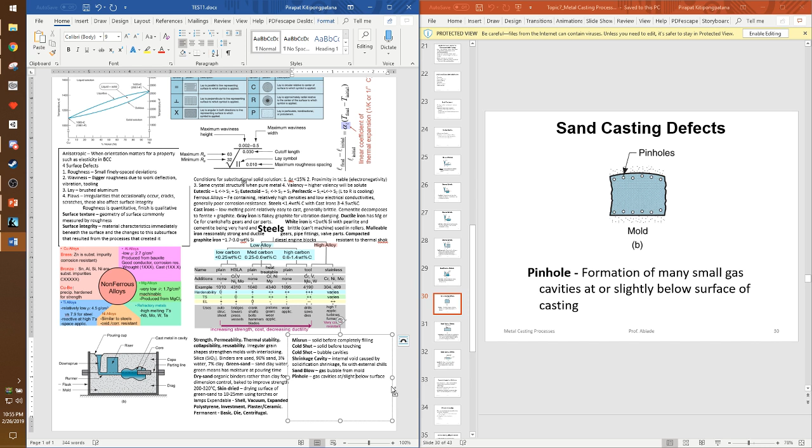Ah, come on. Penetration. So no mold. That looks scary. Mold shift.

Cool. Foundry inspection methods. Can detect obvious stuff, dimensional measurement, ensure tolerance is met, the metallurgy, chemical, and other tests are concerned with quality. Ferrous casting.

I wonder if I need to know these. Got defects, got metal techniques, got 3 stages: heating, pouring, and solidification.

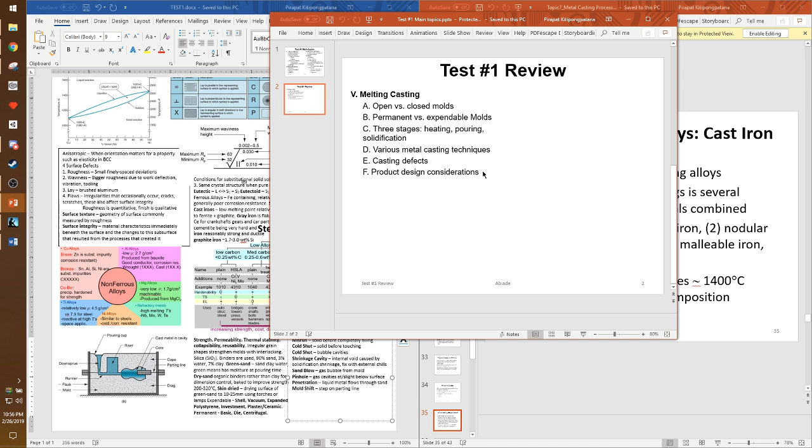Product design considerations. Simple geometries, corners. Okay, I got this. Simple geometries, corners. Fillets.

Tolerances and finish. Like machining allowances, almost all sand castings will be machined to achieve the required dimensions. Additional material called the machining allowance is left in the casting in those surfaces where machining is necessary. Typical machining allowances for sand casting around. Oh, I didn't do that in the design. Oops.

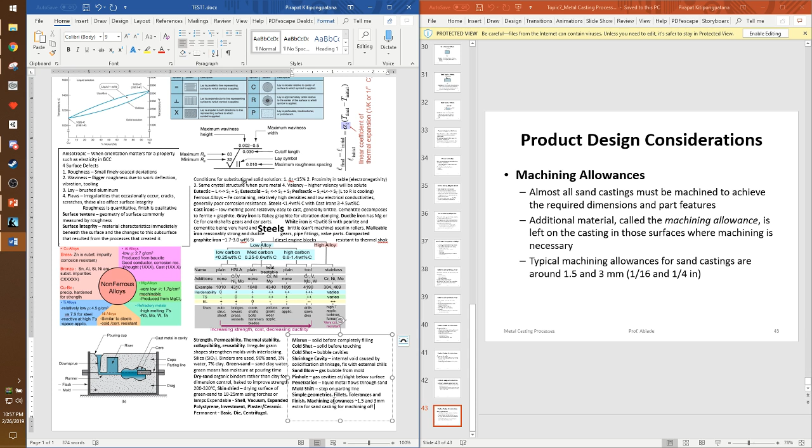Cool, and that is the end of studying. Ah, we did it, we made it 3 hours straight of studying. Oh, I'm so proud of myself. Oh, I learned so much. I'm gonna do so well on this exam.

Alright, next time you see me, I will have updates on how I do on this exam. I know that I'm going to perform fine, I'll be fine. Alright, let's do something fun.

No, I mean, when you're done studying, you should really review the main points of everything. Fine, okay, I'll do that.

Alright, can I go through this in a minute? Okay, nature of materials. Okay, electronic structure, that's the electrons, types of bonding. We got 3 types of bonding that we're going to look at: covalent, ionic, metallic. Covalent is fine. Metallic is a sea of electrons. Ionic is really strong. Crystalline structures.

There's a bunch of types of stuff. There's defects, point defects, and so on. Amorphous materials lack order. Melting and solidification, the processes are different. There, you can draw it, whatever. Physical properties, density, and you know what that is. Thermal expansion, you know that gets bigger when hot, it's less dense, so bigger. Melt, yes. Diffusion is the movement and stuff.